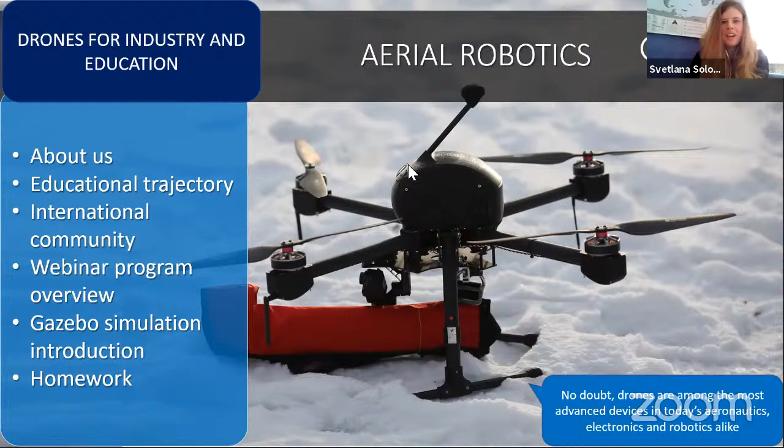Okay, so you know that drones are one of the most popular vehicles and devices in the world. And our company, Copter Express, produces two types of drones: drones for education and drones for industry. The educational drone is Clover, and the industrial type of drone is named Pelican. Also, our company produces drone ports. Drone ports are equipment to provide autonomous delivery. Our company was founded in 2013, and starting from that date, we improve our products and share our experience with all.

What areas of application? Of course, you know it is really wide, starting from search and rescue, filming, and now the most popular is autonomous drones, such as drone swarms, tasks for unmanned cargo and goods delivery, and different types of monitoring. But the main problem of this wide area of application is that there are not enough qualified specialists in autonomous drones for hardware and software development.

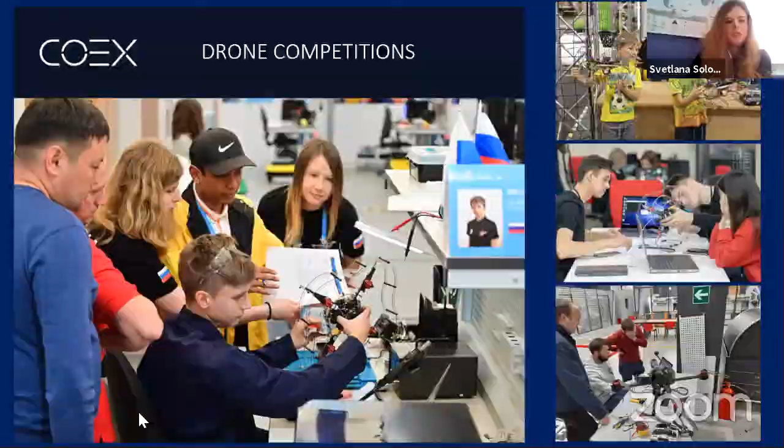We provide different types of events for different age categories, starting from 12 years old, and we don't have an upper age limit. But of course, the tasks are different between juniors and university students.

One of our important historical moments: we started providing educational activity in 2016, and that year we had a focus on different types of drone application, including manual control and drone development systems, and it allowed us to be closer to aerial robotics systems. And now we have a focus on drone programming and provide the full development system of autonomous drones. 2020 was a really great year to transform our offline activities into online. And we will tell you about it later, how we did it.

So our drones consist of open source technologies. On this platform, we use a Pixhawk system for the flight controller and Raspberry Pi 4 as a single board companion computer. This system is the same for educational drones and industrial drones. So starting your education on Clover, you can get all skills for software and hardware development, and it will be similar for industrial drones too. But of course, there will be some differences in scale, maybe some functionality, but the principles will be the same.

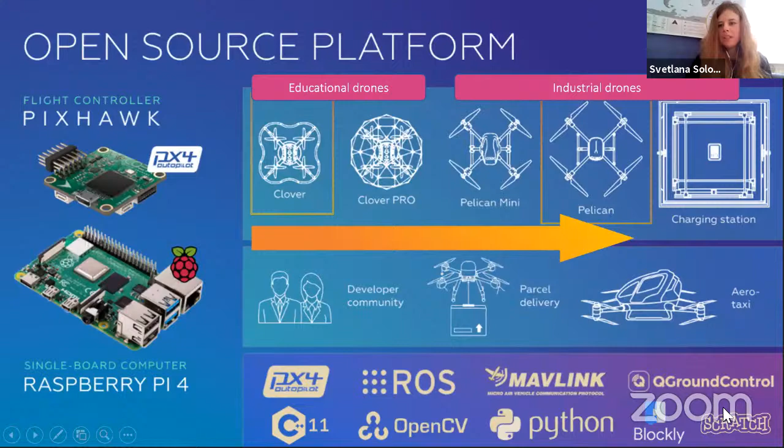Also, our open source platform supports the Python language, ROS, and block programming for school students, such as Blockly and Scratch. So using the COEX Clover drone, you can develop your skills in assembly, such as design engineering, soldering, 3D prototyping, problem solving, knowledge about electronic devices, and more. Skills in flight and piloting, of course: FPV racing, monitoring, manual piloting, and aerodynamics.

And the most popular trend of drones, of course, is autonomous drones. You can start learning programming on the drone using Python and C++. Also you can use computer vision and the Robot Operating System on this platform.

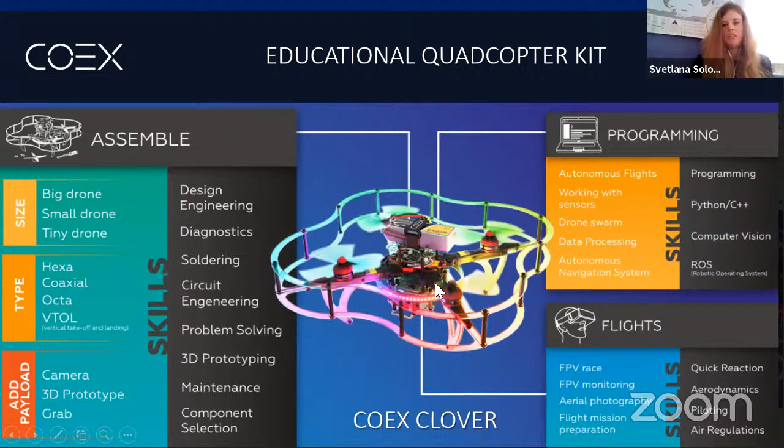So now our community consists of more than 20 countries, and it's a really great step in our development, because many active members from each country contribute to our open source system. They share with us their projects, their knowledge, and their achievements in drone development. An interesting fact is that the average age of our community members is approximately 23 years old, and each year it becomes younger.

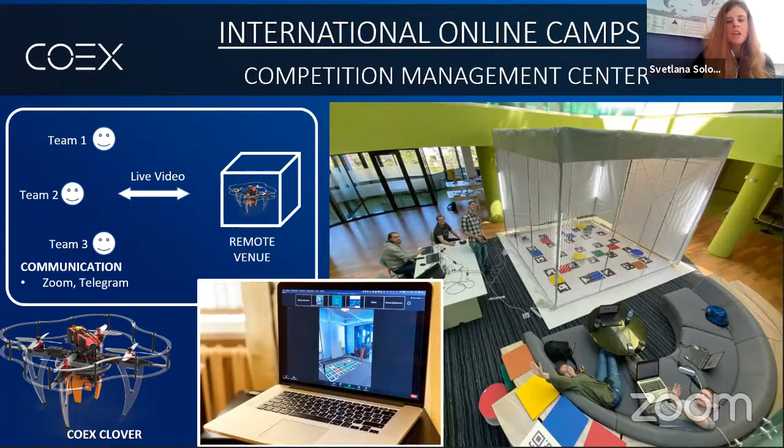So during the last year, we had many problems and many questions about how to teach students during the pandemic and how to develop the international community. And we developed a solution. We developed a real online competition, not only using online tools, but also real equipment. We built a competition management center, equipped the flight zone with real drones, and we used online tools for communication, such as Zoom, Telegram, and YouTube. Through these tools, our competitors took part in our events, such as BRICS, WorldSkills, and online camps. They sent their code, and they saw the drones flying and performing their tasks.

So it looks like this slide. You can see how our competitors perform the task in the simulation environment. Then they run the code on the real flight zone, named the remote venue. And the live stream was organized on YouTube.

So this task was QR code recognition. They should recognize the data from the QR code and perform the flight mission. I will open the secret for you.

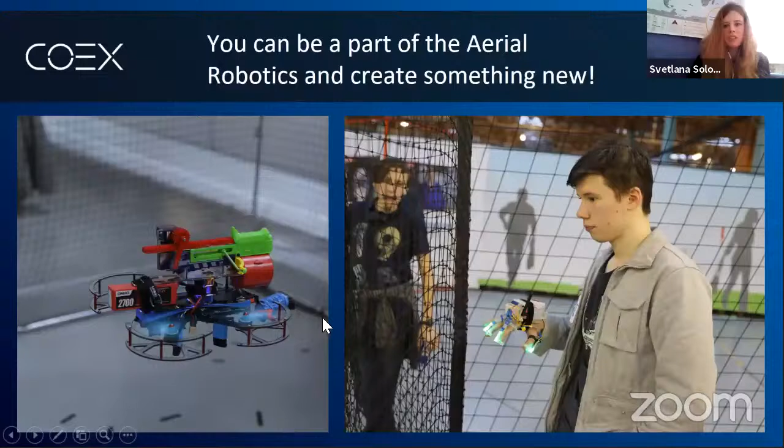Now I would like to share with you one of the interesting projects or activities that we organize too. It's CopterHack. It's a hackathon for drone enthusiasts. The participants provide and demonstrate their ideas in this area. For example, drone control by hand with sensors.

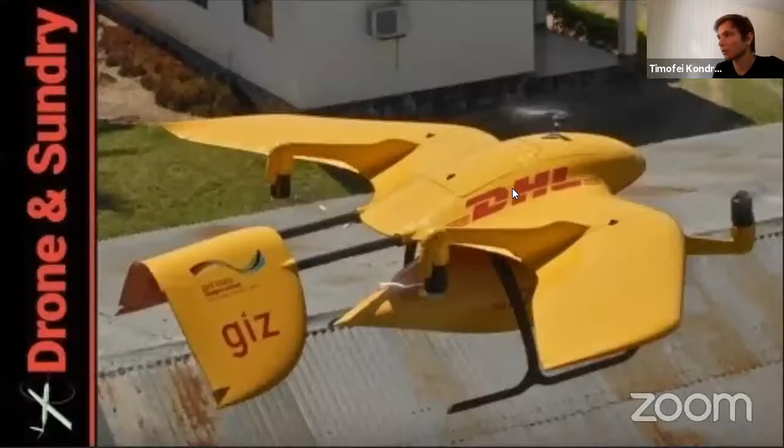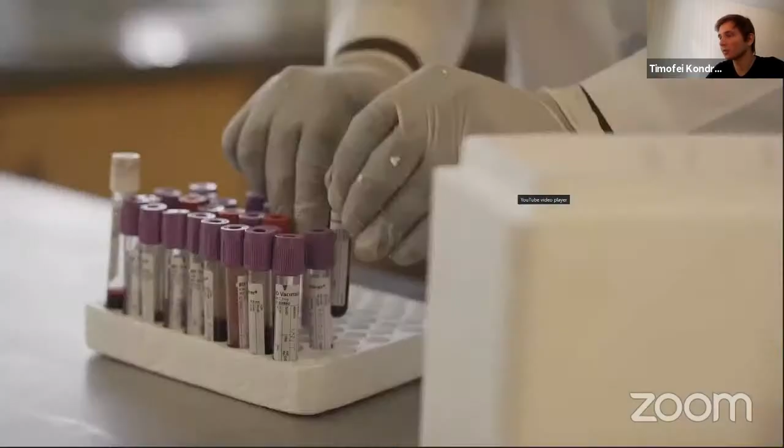So one of them is, of course, cargo delivery, which is a very great way to deliver important packages. For now, there are several projects on cargo delivery, including this one. In our company, we also develop a package delivery system. So it may help many people in the world to deliver very important packages in little to no time.

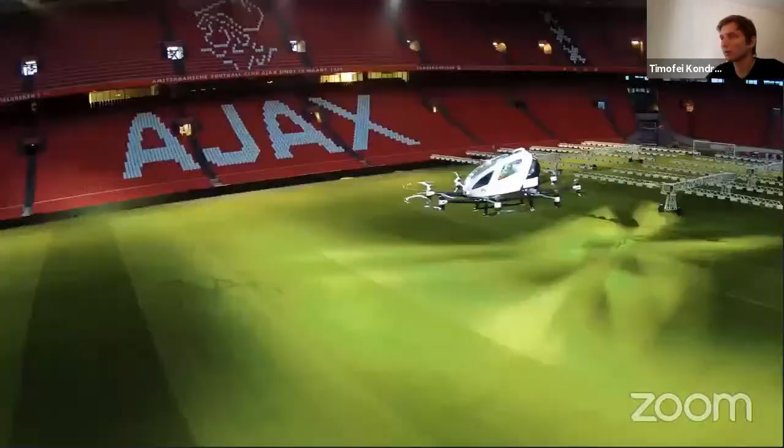The other application is the air taxi. Those are actually autonomous drones. They look like they are manually controlled, but they are usually autonomous. So this is one of the applications of autonomous drones. And also, drones can be used as firefighters and in rescue missions. So you can use them for many, many different tasks.

Of course, there is entertainment and sports, such as drone racing. Drones are flying very fast, and people learn to master their skills for many years, and they become very good pilots and achieve these incredible results. And there's also a new wave of drone racing, autonomous drone racing. So in the nearest future, you will also see races by autonomous drones.

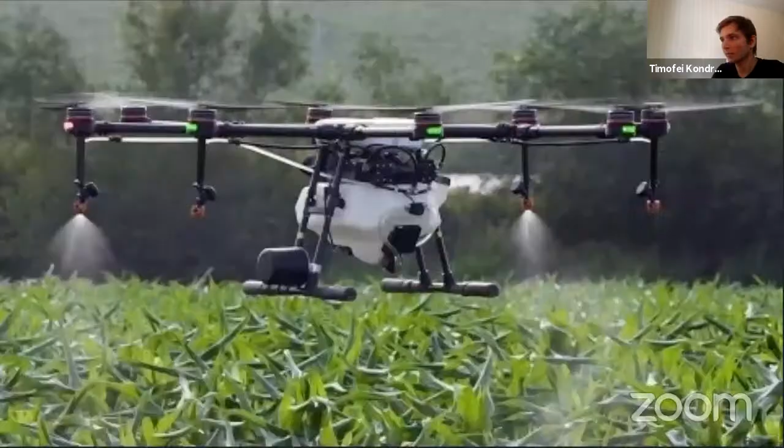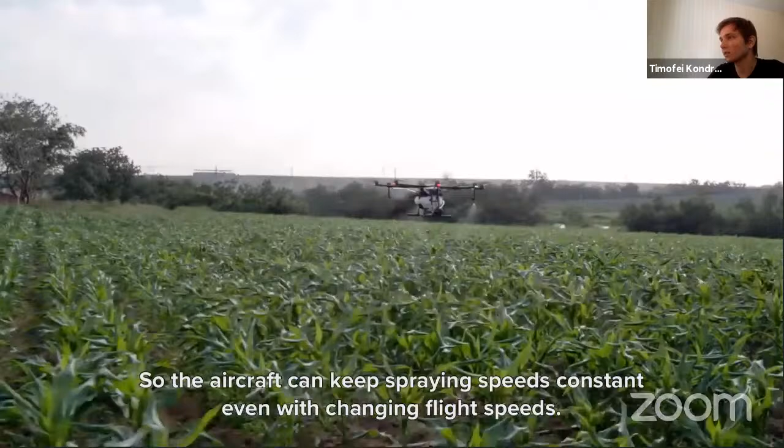Agriculture is another application. So drones can be used for spraying liquids on the plants. It is not just water, but water with some added things to make plants grow better. And it reduces the costs of growing food, so this is a new industry that is rising right now.

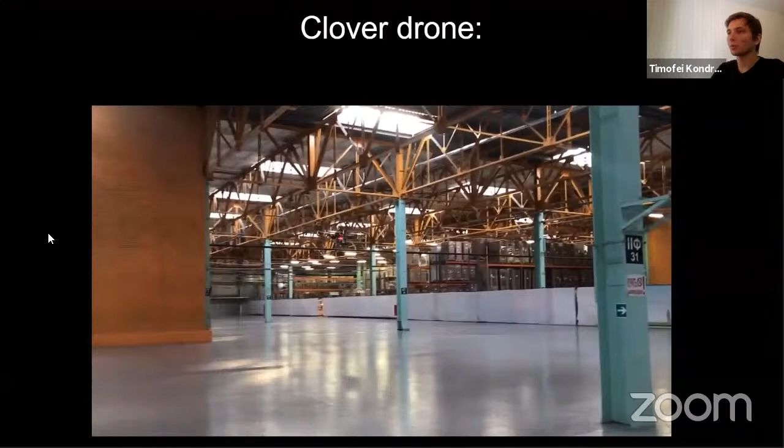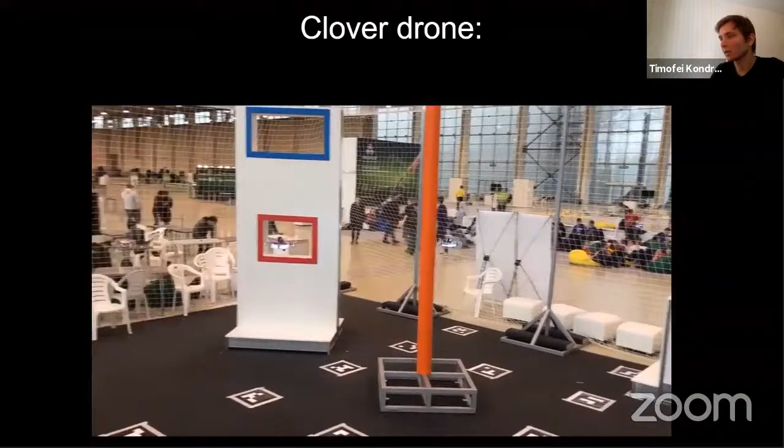And how about the Clover drone? What can it already do? So this is a small video that shows how you can program Clover for now. The drone is equipped with a camera here for navigation and for color recognition and shape recognition. You can use it as a positioning system, and if you have several drones, you can make a small indoor swarm of drones.

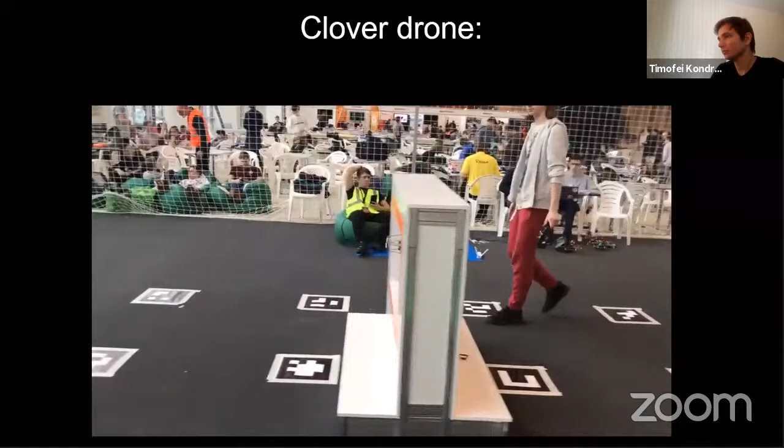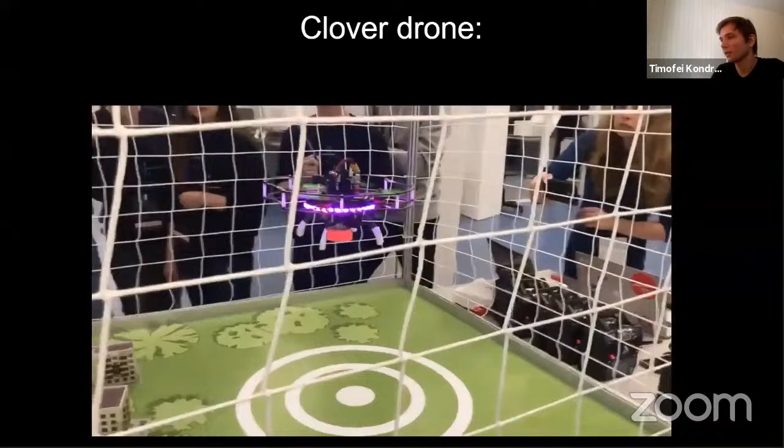And Clover participated in some international competitions, and it showed that this platform is very powerful, and you can achieve many, many cool results with it. So there's aerial acrobatics of the drones. So you can see that the drones can perform autonomous flips.

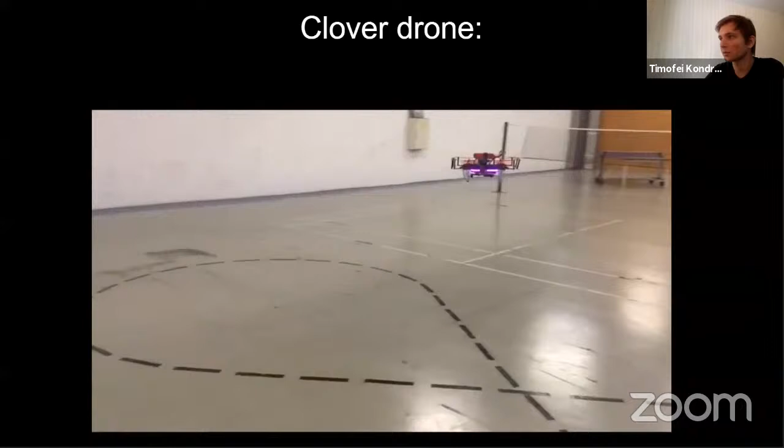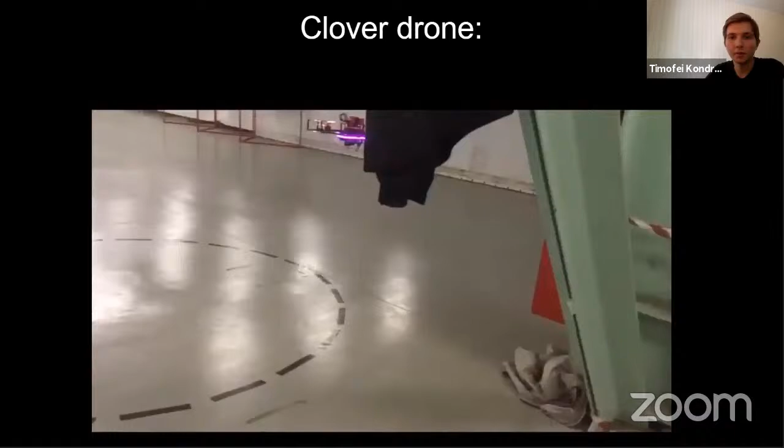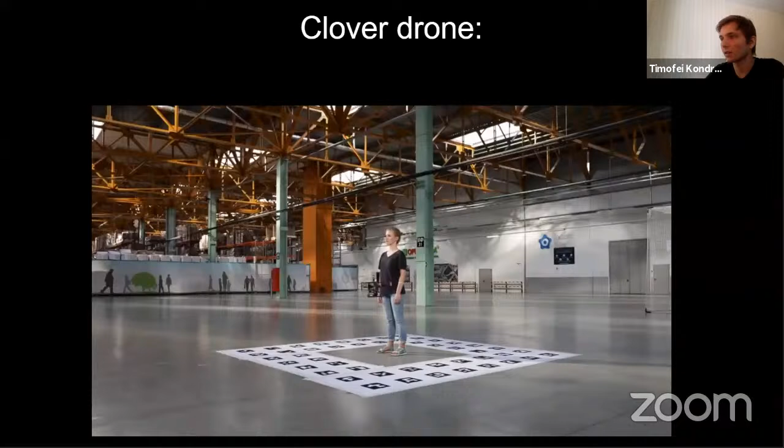They can use computer vision to navigate through the environment, and you can learn how to program computer vision systems with the drones. Also, they can be equipped with different kinds of sensors, including this depth camera that makes a 3D scan of a person, which is another application of drones. And you can also deliver small types of cargo with it.

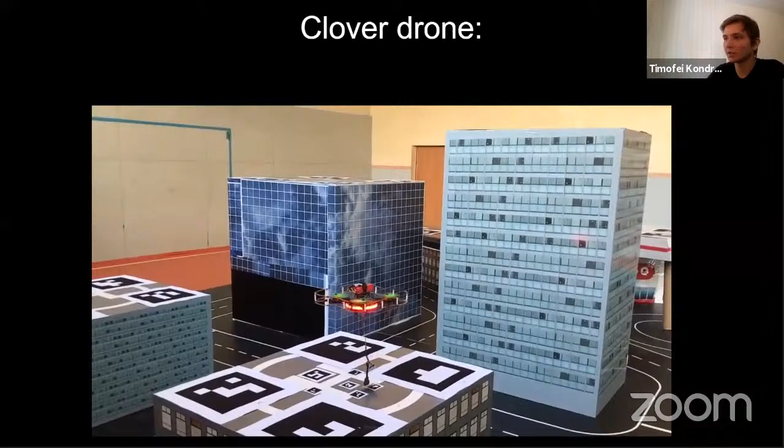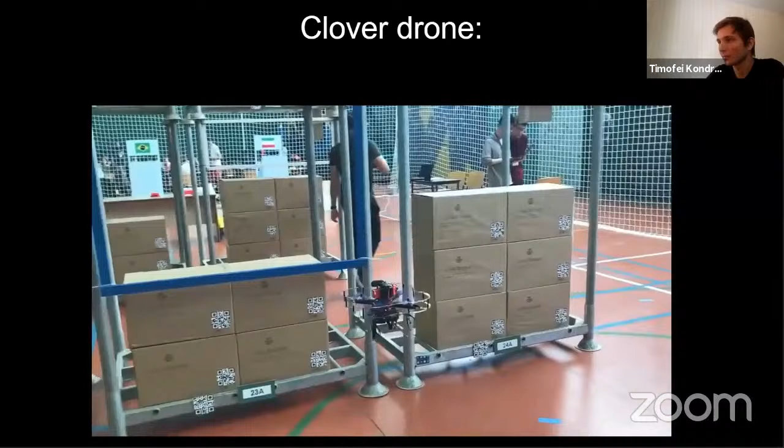Of course, this is just a simulation of what you can do in the real world, but you need to start with something. And it's a good educational application of drones. So as you can see, the drones can be used in storage, in warehouses, and in theaters. So this is a Clover swarm used in a theater. They are controlled autonomously, of course, and there's a real performance with the drones. So this is what you can make with Clover.

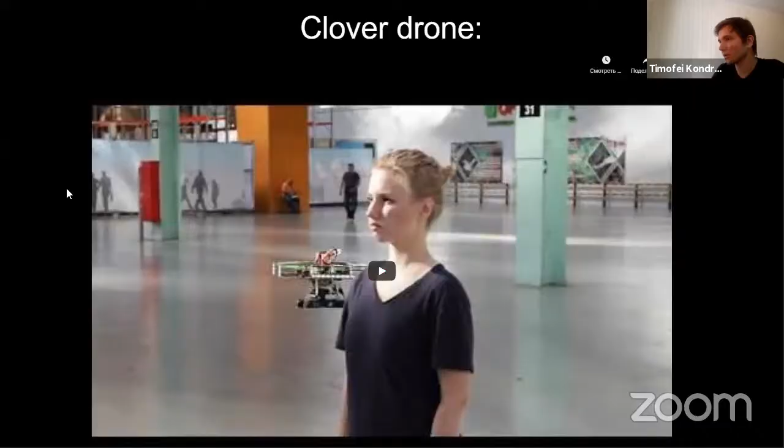There are other applications, for example, the CopterHack that Svetlana just told you about. And I can show you several projects that have been done with Clover. For example, one of the projects is the generative design frame. So you can use Clover as a base to create your own design of frames. And this project is just about that.

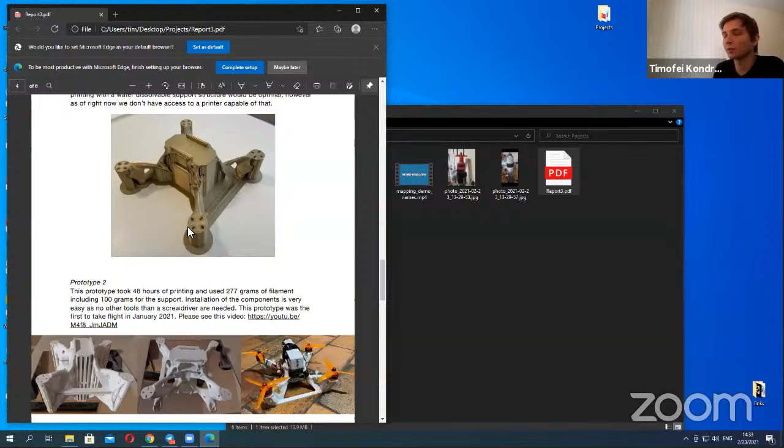They used computer simulations to optimize the shape of the Clover frame. And this is what turned out to be the optimized shape. It's pretty interesting in my opinion. And also with a protection. I can show you the video of this drone already flying. So you can use Clover as a platform to develop new types of drones.

Another application is mapping and creating a map indoors. This is a project made by 3 students from Qatar. They created this first in simulation, then they are transitioning to a real drone. They are making a map based on the LiDAR sensor that's put on a drone. And you can see that it creates a map, and you can use this map for planning the house and planning renovation projects and so on.

And the drone is flying autonomously. There is a program that controls how the drone should move depending on the obstacles it's facing. And of course, another application is why not put paint on a drone? So you can put paint on the drone, aerosol, to make automatic paintings.

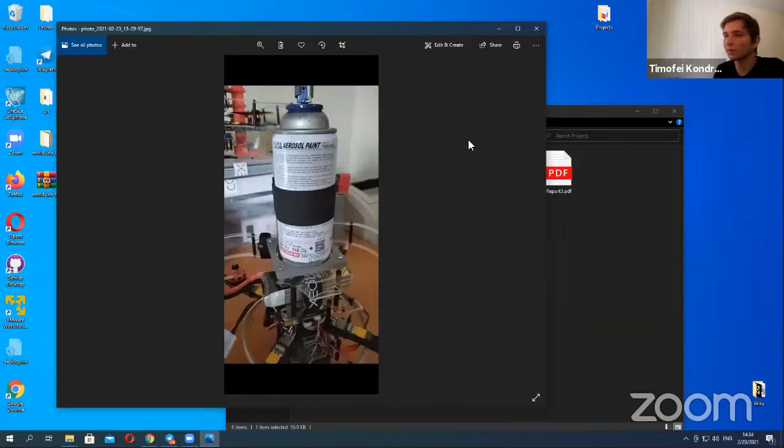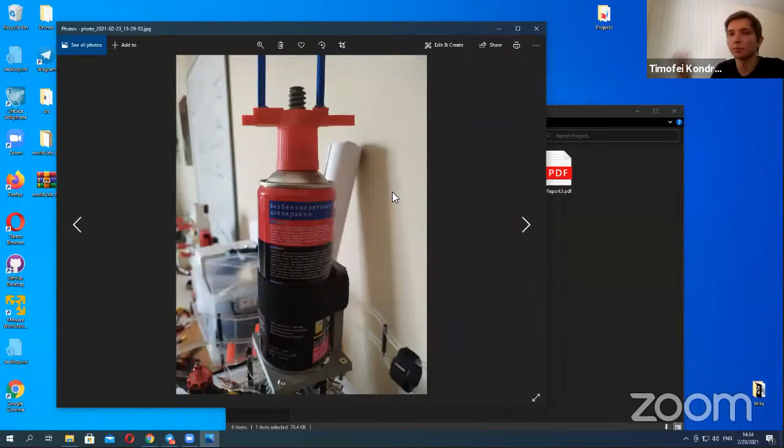A few teams attempted this before, and one of the teams is participating in Copter Hack, which is nice. We want to see cool graffiti made by drones. It's so great. Okay, let's continue with our presentation. So our product has online documentation. You can access it by the link.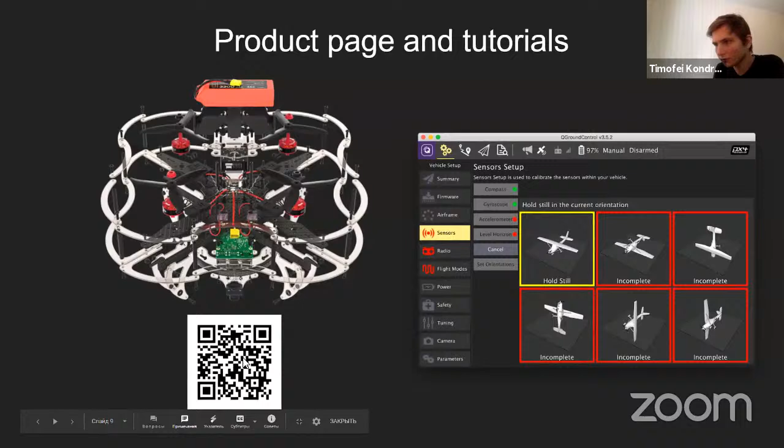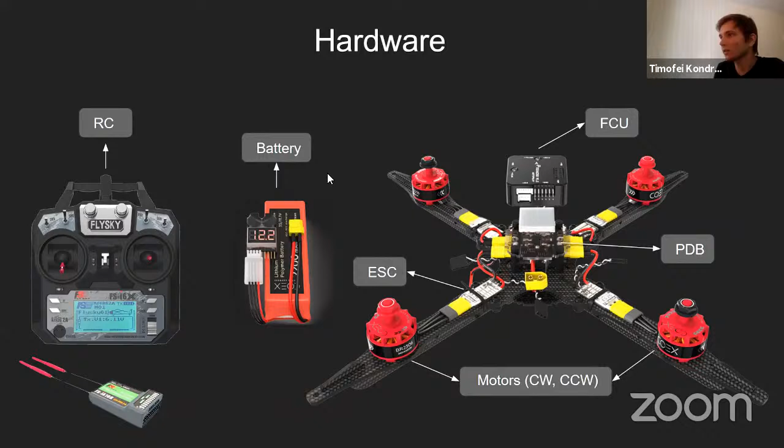What does it consist of? So first of all, it's a remote controlled drone. You can control it with an RC controller. And it is made of the typical parts for a drone, like motors, electronic speed controllers, flight controller, battery, and frame. But the most powerful part of the drone is that it's autonomous, and it has an onboard computer, Raspberry Pi.

Raspberry Pi is a very popular small computer that usually runs Linux. In our case, it runs our custom-built Linux that has all the packages necessary for controlling the drone autonomously. And there is a camera and IR rangefinder that helps the drone know the exact height. And there's also a link for that.

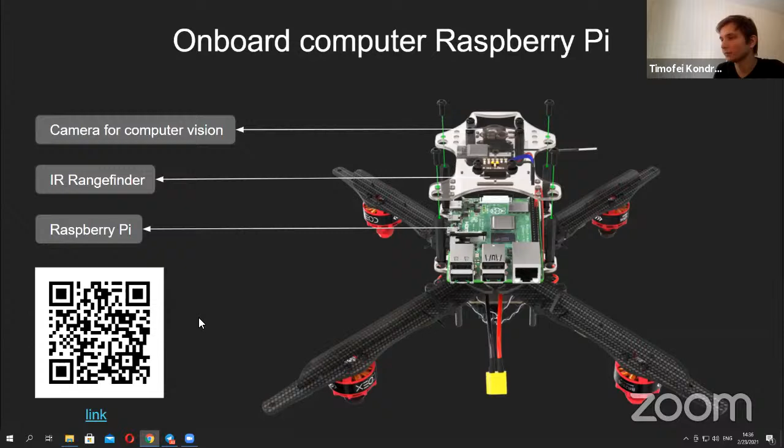So what software does it use? Well, we try to always use open source software. One of the pieces of software is PX4. This is the software for flight controllers. We have a custom version of PX4 firmware that's made for the best experience with Clover. But you can use the default version if you set it up differently.

MAVLink is a protocol that helps the flight controller communicate with the onboard computer, the Raspberry Pi, and they are connected via USB cable. And ROS is one of the biggest parts of software on the Raspberry Pi. ROS is the Robot Operating System. I will tell you a few more words about ROS after this slide.

And the camera helps the drone navigate in an indoor environment. So this is how it recognizes ArUco markers. Those are black and white markers that we usually put on the floor, and the drone knows its position based on that from the camera. Of course, we have a simulator where you can try all the stuff we're talking about, and I will show you how to install and use the simulator soon. So let me talk about ROS a little bit more.

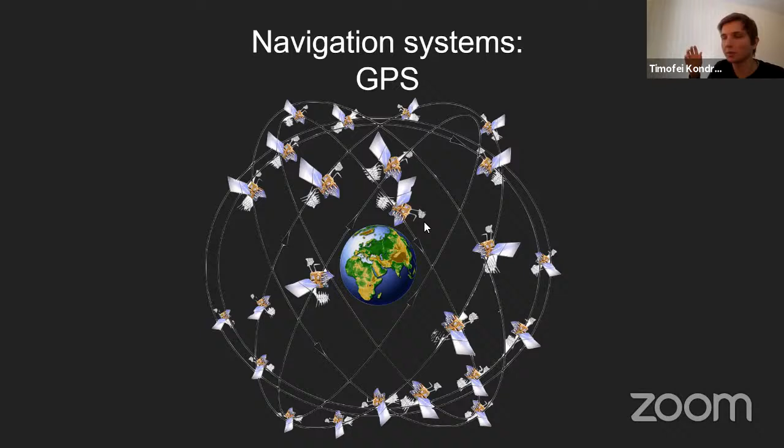continue with the presentation. So what are the positioning systems of the drone? If you are working outdoors, you have GPS. It's a good way of positioning. You can increase the precision of the system if you are using RTK GPS. It will allow you to know your position with a few centimeters precision. This is very precise, but it doesn't work indoors.

And indoors, you may use another type of navigation system like motion capture, but this is usually an expensive setup, and it's very powerful but difficult to use. You need several cameras and a powerful machine to analyze the data, and you also have to have a very fast connection with all the drones that you are working with. So not very useful for indoor flight.

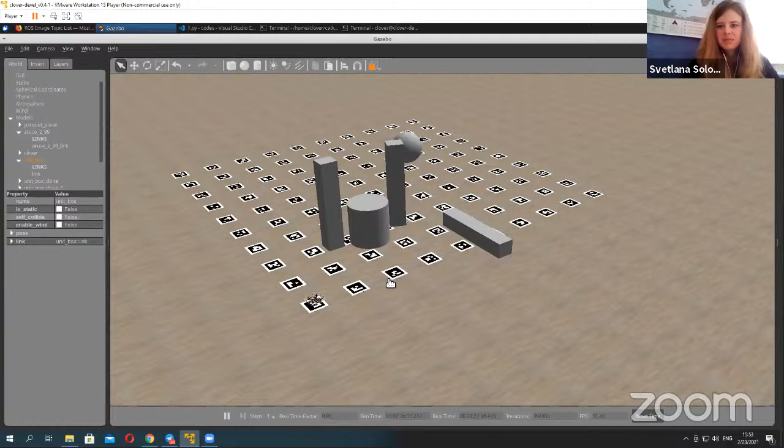Yeah, Timofey, we have a question. Okay, I see the question. Can it detect if it will hit something? Yes, if you put some extra sensor on the Clover. For example, like I showed you the project with LiDAR. If you put a LiDAR on top of the Clover, it will detect 360 degrees around the drone, and you can use this information to know whether to fly forward or not.

Or you can just add another IR rangefinder. For now, we have one rangefinder pointing down. If you add another one, you can point it in any direction.

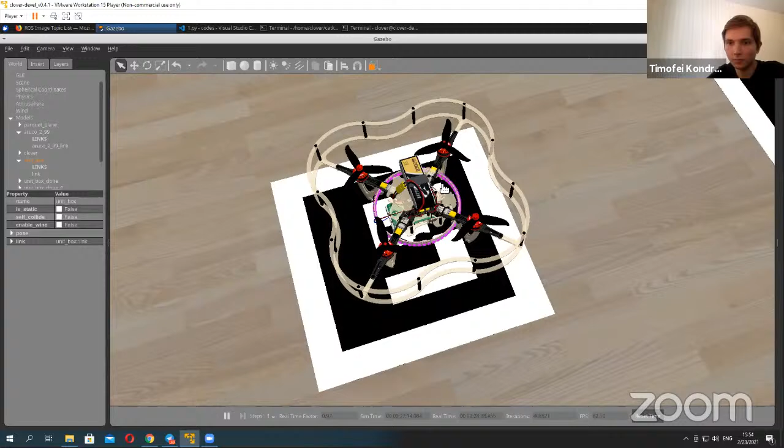Timofey, also, are there any code examples in the Gazebo Clover? Is there or no? Some code examples are stored in home examples, but they are very basic, so you can use them and make something more complex. Mm-hmm.

Okay, so what will be tomorrow? Tomorrow we will have this agenda. First of all, we will explain the homework. Homework will have 2 levels: simple and hard. Then we will continue our lessons, and Timofey will tell you about how to work with sensors on the drone, and tell you more about the computer vision system on Clover.

And finally, we will tell you about next steps in the aerial robotics area. So we will tell you about our upcoming events, competitions, and projects. So the day will be interesting too.